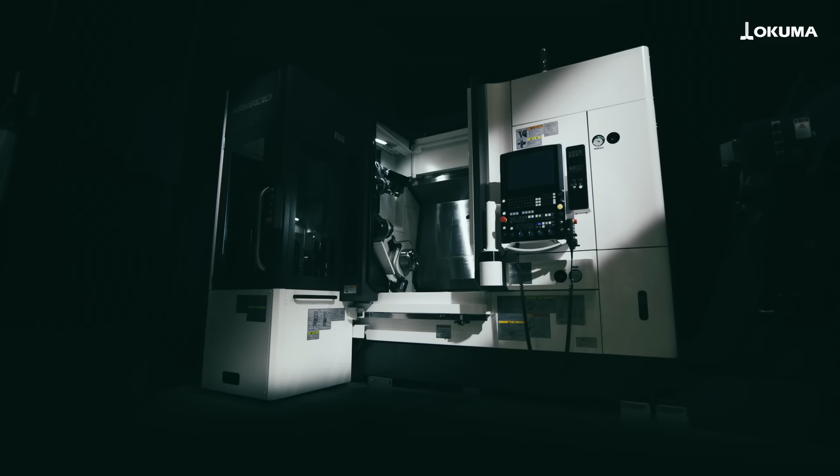Robots for tomorrow. Humans for future generations. Changing the future of manufacturing with the Armroid robot system.

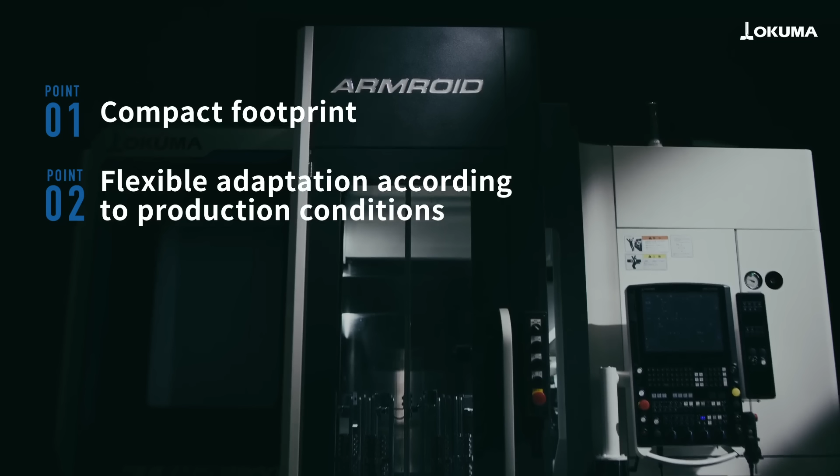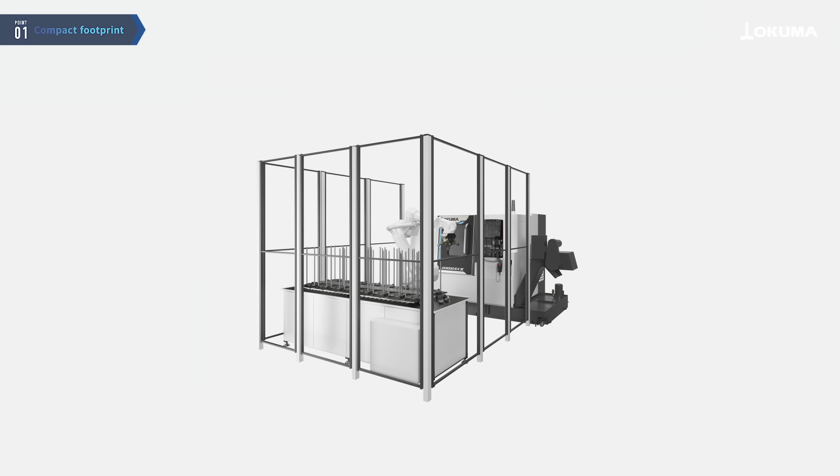Okuma's Armroid is a robot system that offers a compact installation footprint, flexible adaptability to production conditions, and easy automation with high operability that anyone can use. Its unique structure, with the robot built into the machining chamber, reduces installation space by 80% compared to standard robot cells, enabling space-saving automation for multitasking machines.

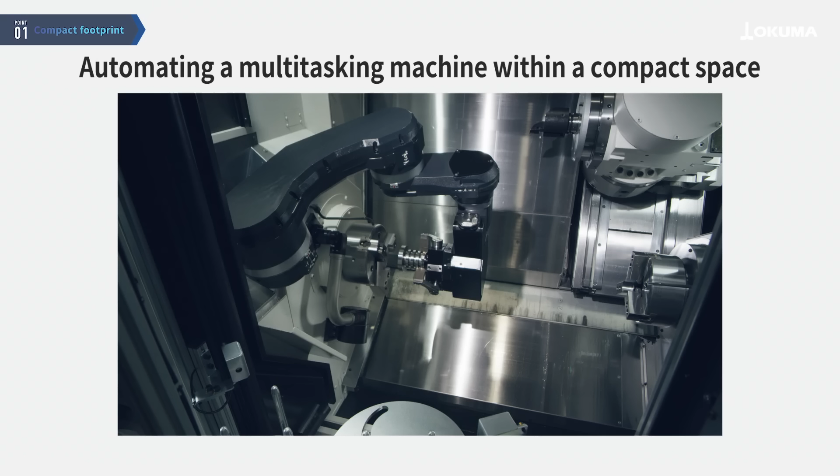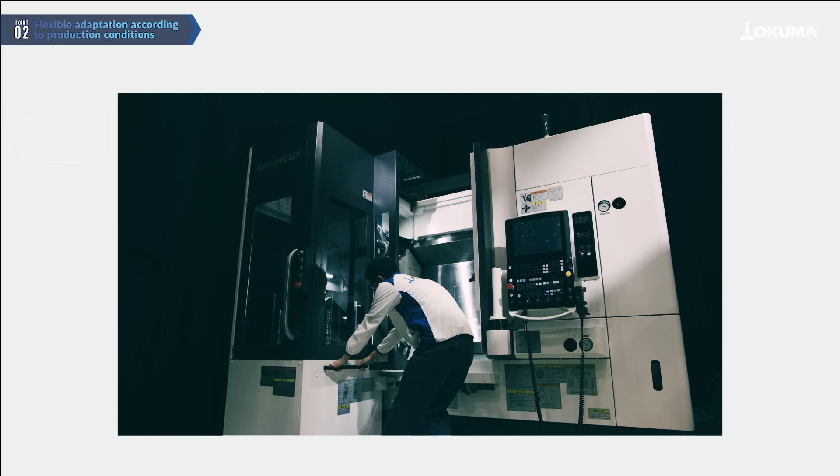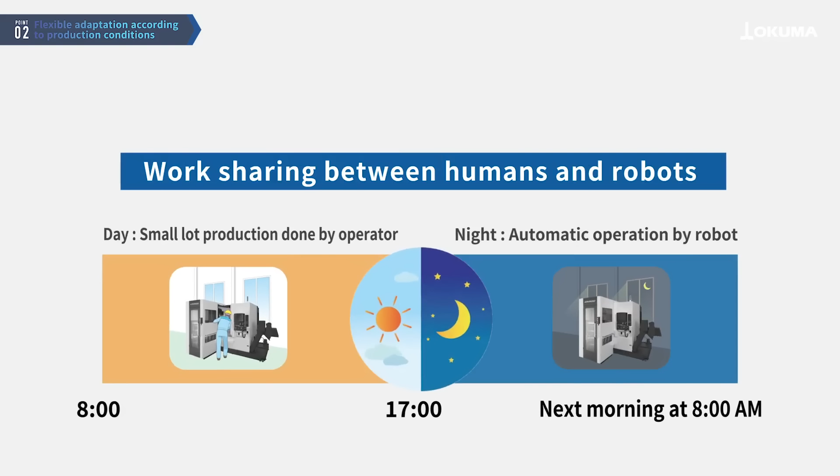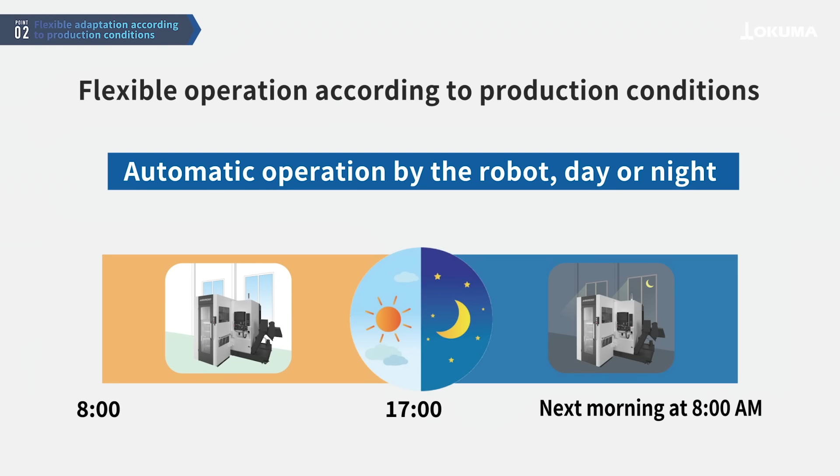Armroid allows for easy switching from a standalone machine to a robot machining cell simply by moving the work stocker, and can be flexibly operated for different purposes, such as automated night operations or low-volume production during the day by human operators. Furthermore, it enables continuous operation day and night using the robot.

The end effector at the tip of the robot arm is stored within the machine and can be automatically changed, making it easy to switch between different uses. End effectors can be selected according to the shape of the workpiece, accommodating both shaft and flange shapes.

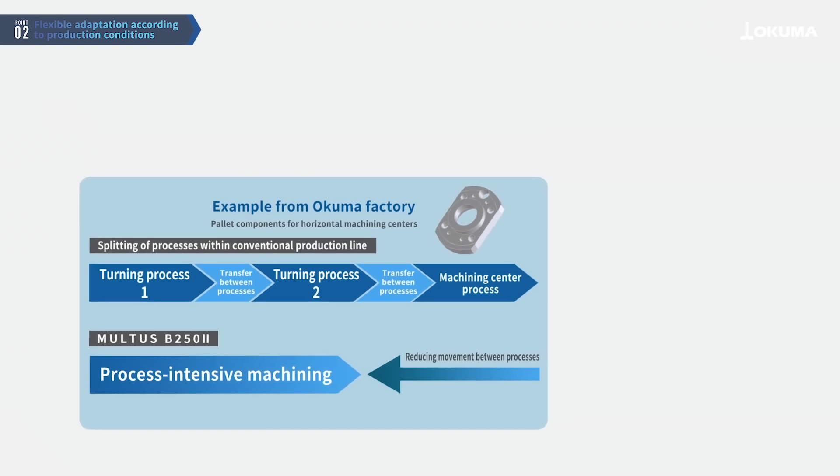In Okuma's in-house factory, the synergistic effect of process integration with multitasking machines and automated transfer with Armroid has achieved 20 hours of automated operation.

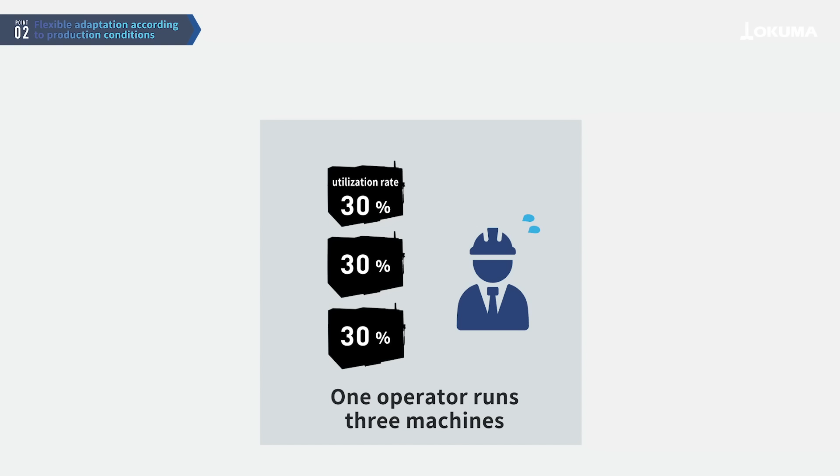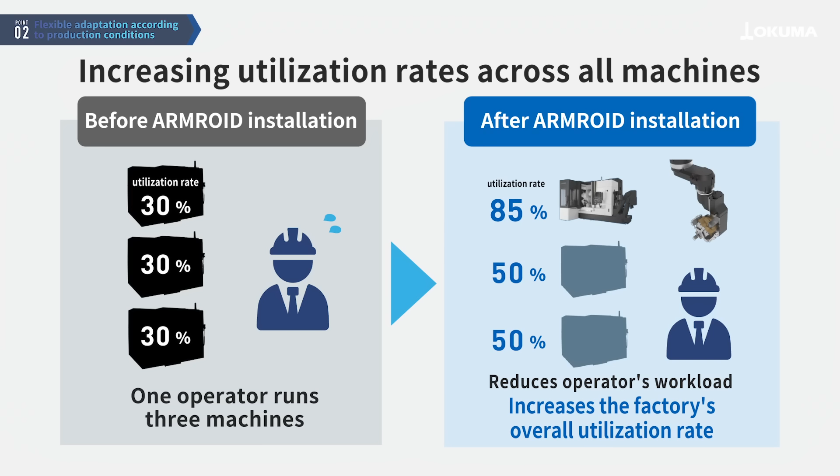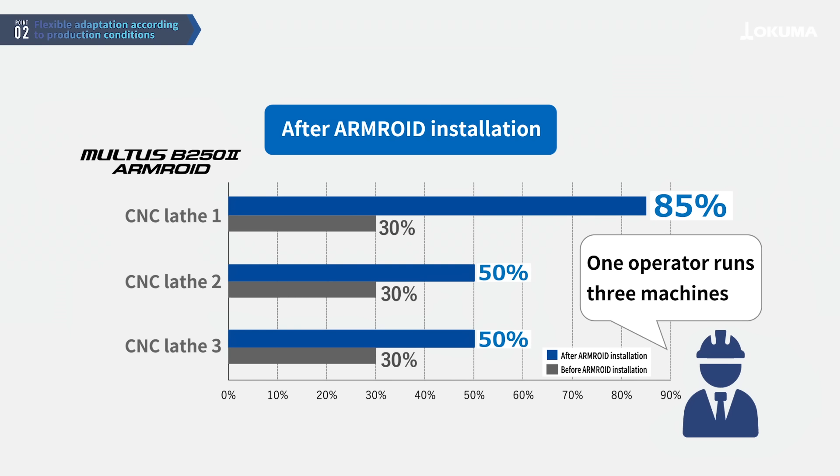This system has also proven effective in customer factories. At a factory where a single operator was managing 3 lathes, replacing one machine with the MULTUS B250II ARMROID resulted in improved utilization rates for all 3 machines. By automating the MULTUS B250II ARMROID and operating the other 2 machines simultaneously, the operator's production capacity doubled.

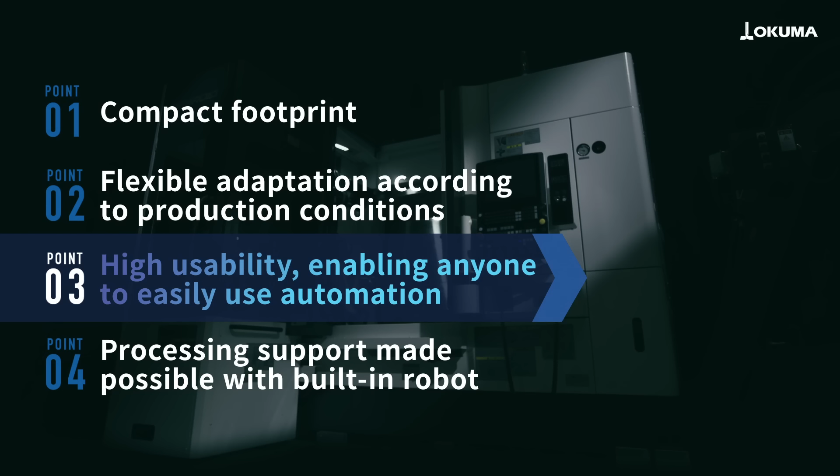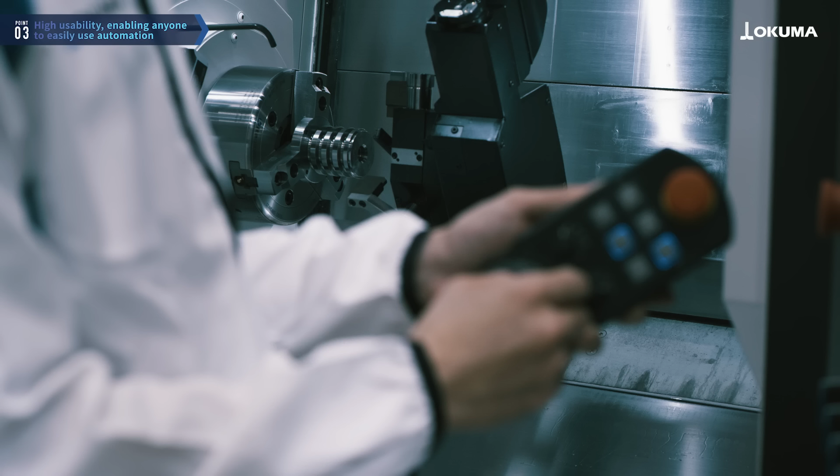The robot's motion program requires only parameter input, making it easy to operate even for beginners from the first day of installation. The robot can be controlled using the machine's operation panel or pulse handle, allowing operators to run it as easily as they would normally operate a machine.

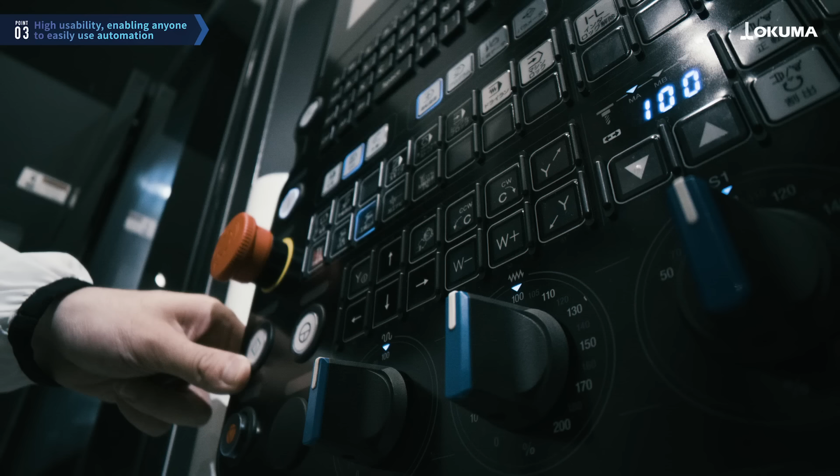The controller is equipped with the OSP P500. The robot's movements can be checked from the machine's operation panel.

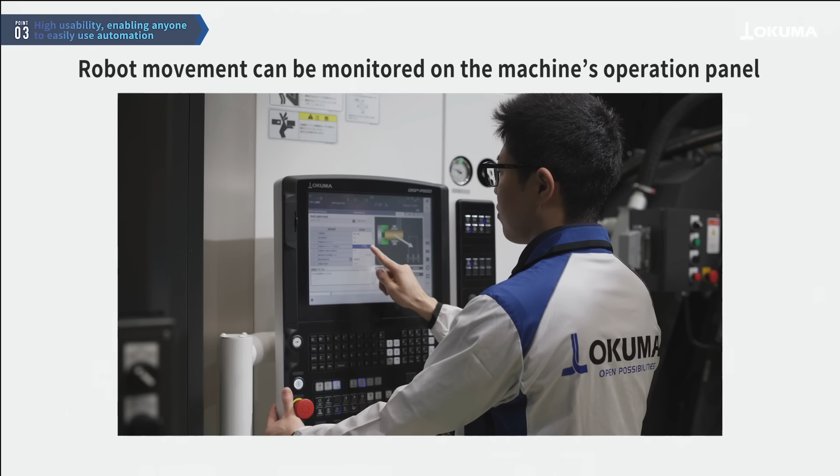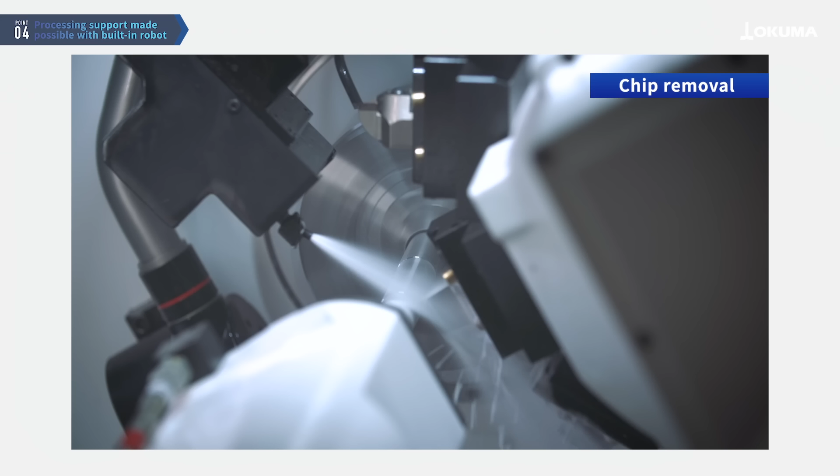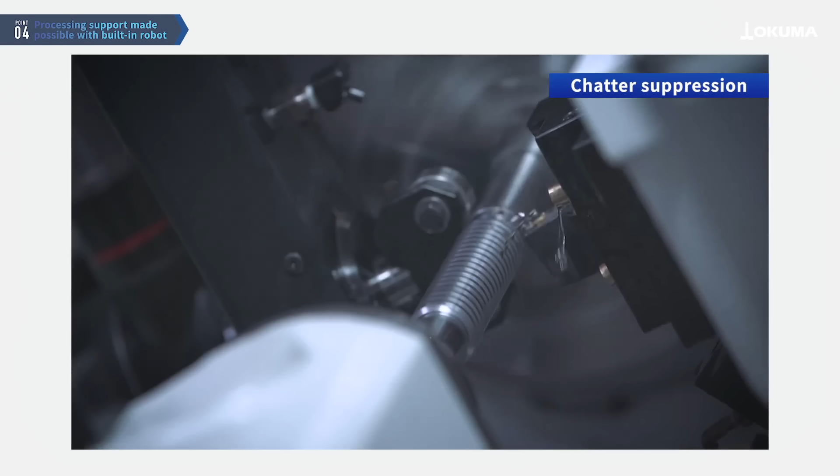Because of its unique structure, with the robot built into the machine, various types of machining assistance are possible. For example, the built-in robot enables specific machining assistance, such as preventing chips from sticking using a mixing blow of coolant and air, reducing chatter in long workpieces with backup rollers, and cleaning the inside of the machine.

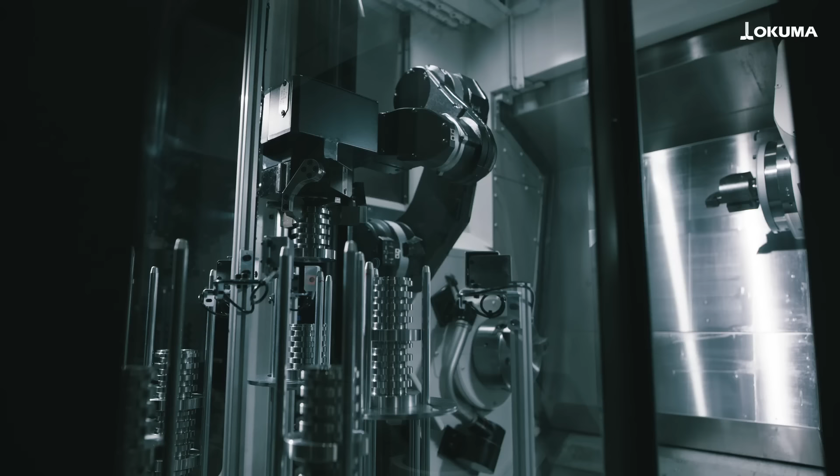The compact installation footprint, flexible adaptability to production conditions, and operator-friendly design make the Armroid robot system a valuable solution for addressing labor shortages in factories while contributing to increased productivity.